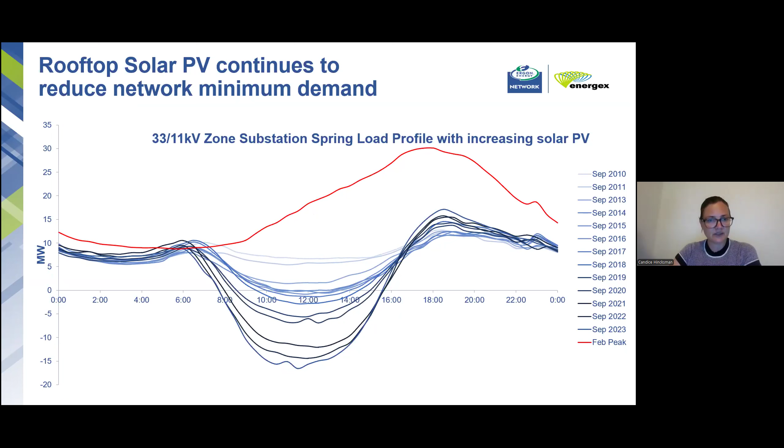And so we take a really keen interest in things that impact on electrification, on energy efficiency, or on demand flexibility, because they're all really important tools that we have as a network business to be able to address the problem that you can see on the screen now.

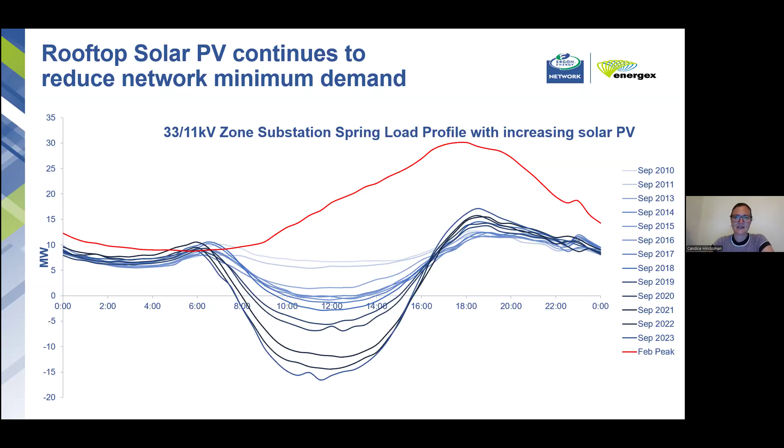So as the manager of the demand and energy management team, I run a series of demand flexibility programs. In a minute, I'll have a chat about the demand flexibility program for hot water. But that's one of many programs that we run, including our network connected battery program, our PeakSmart air conditioning program, and the programs we run to encourage the demand flexibility of electric vehicle charging.

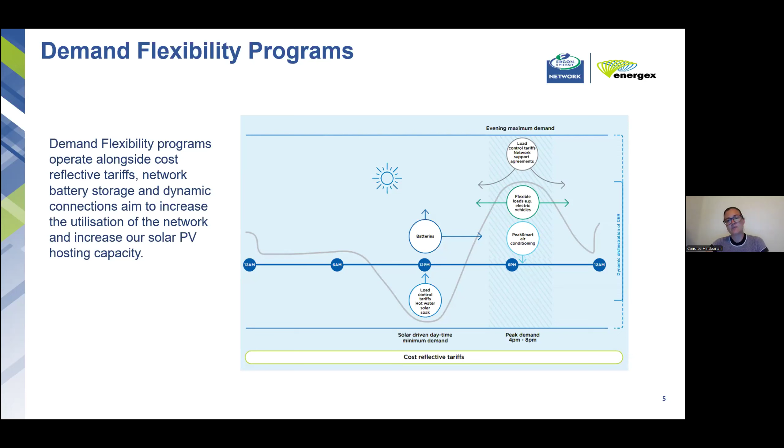And all of those programs have been underpinned by cost-reflective network tariffs and have the impact or goal of moving load outside of the peak demand period and moving that load into the middle of the day minimum demand period.

But on to hot water, because that's what we're all here to talk about today. The distribution network businesses in Queensland have had a very long history of operating hot water demand flexibility programs. These programs started back in the 1970s using our audio frequency load control technology, which is a signal that gets sent down the power wire to a signal receiver that's sitting just behind the meter. And it has the ability to turn off resistive storage hot water units.

And in response for customers participating in those programs, they have been exposed to cheaper electricity rates. This program that we've operated originated to create an overnight baseload for our coal-fired generators to be able to continue to operate in the overnight period. But as Southeast Queensland continued to experience population growth, we started to see a lot of infill happen, and we also started to see an increasing adoption of air conditioning, which slowly started to increase our evening peak demand period. And so the program evolved into a peak lopping program.

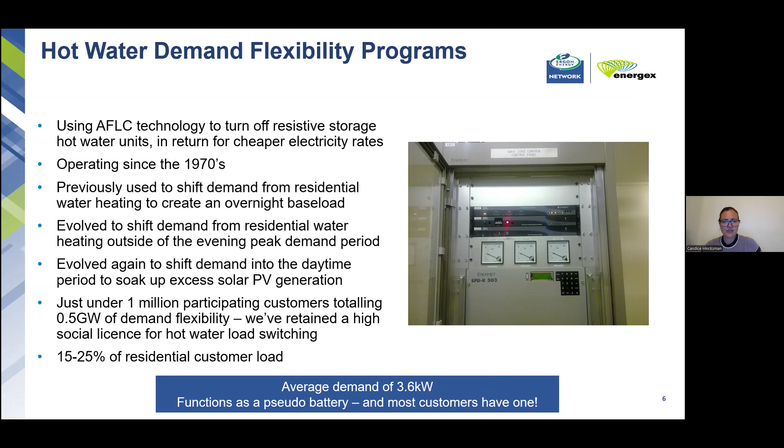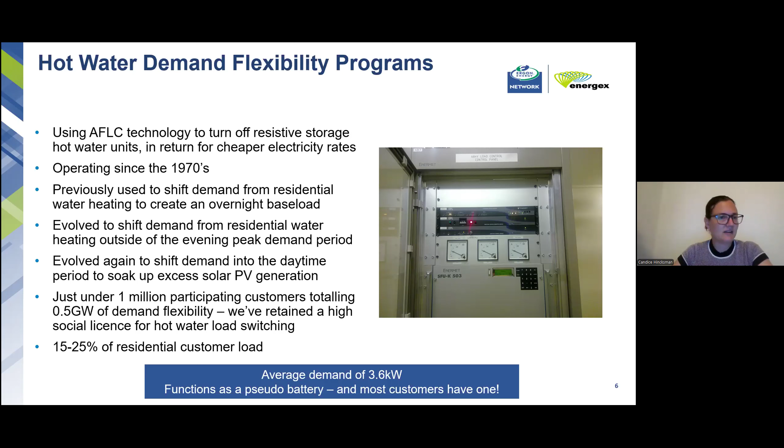That's really important for us because that program represents somewhere between 15 and 25% of our residential customer energy consumption. And with those resistive storage hot water units having an average instantaneous demand of 3.6 kilowatts, it's a substantial amount of load, and it's been operating as a pseudo battery that most customers have behind the meter. So that's where we've started, and heat pumps are here now. We do have a small number of heat pumps on the program.

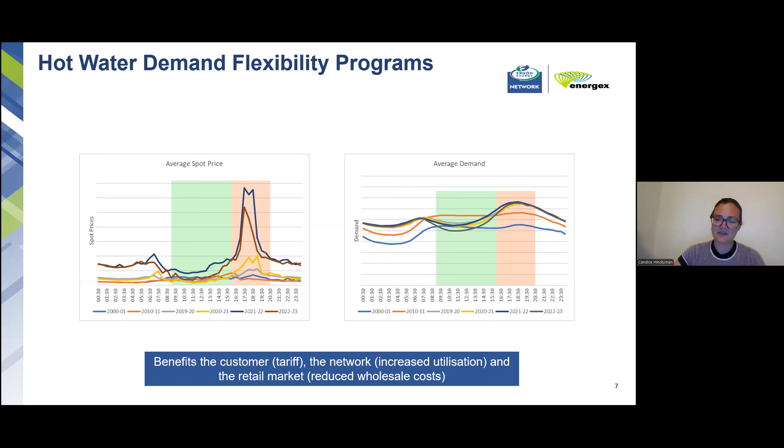I'm cautious that solar soaking is an absolutely fantastic thing, and we encourage solar soaking, and we love to see energy efficient appliances operating when the sun is shining. And 360 days of the year, this is a fantastic outcome for network businesses and for the market and for customers. I do know that there's 3 or 4 days of the year where we have abnormal peak demands hit the network when we have a cloudy day, and that demand flexibility is really important there so that we can ensure that load is not appearing and adding onto that network peak.

And so that means that the type of demand flexibility we have is relevant. And as a network business, we're not seeking to have demand flexibility every single day, but just in those days that really matter. So a key point here is that making loads flexible at the point of electrification is going to enable customers to maximise the value of their investment and their upgrade in a heat pump.

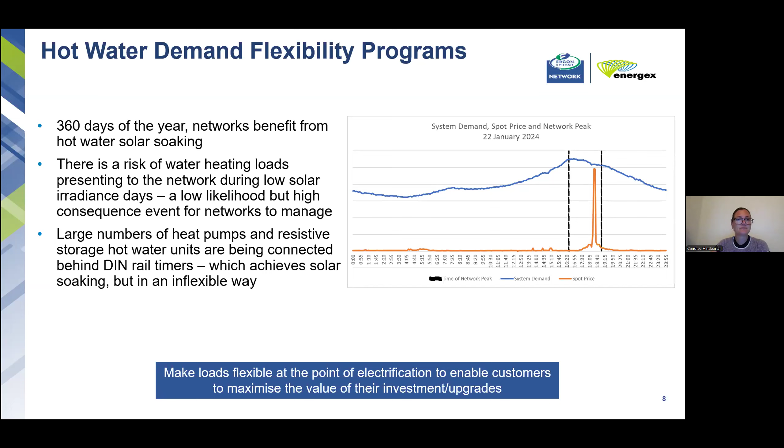But here we are, we're talking about heat pumps, and heat pumps are different to resistive storage hot water units. And so we need to take a fresh look at what demand flexibility looks like in that new environment. We're aware that heat pumps are more energy efficient than their resistive storage counterparts, and so less energy is going to be required to heat the same amount of water.

And we are in support of that electrification and that energy efficiency, but we're conscious of the impact that will have on network minimum demand. We're thankful and recognise that heat pumps place less instantaneous demand on the distribution network, which can really lower the risk of heat pumps contributing in isolation to network peak demand, and also aware that heat pumps require a longer period of uninterrupted supply compared to a resistive storage hot water unit. And so that needs to be taken into account in the way that demand flexibility is operated as well.

That said, the accumulated impact of millions of customers with heat pumps is still going to cause impacts on the distribution network business if it's not appropriately managed with demand flexibility. And so again, I'll just reiterate the key point from a distribution network perspective and from the perspective of enabling customers to absolutely maximise the value of their investment in a heat pump. We need to ensure that they are flex enabled at the point of purchase and installation, so that customer can present their load to the network and to the market in a way that helps them save money.

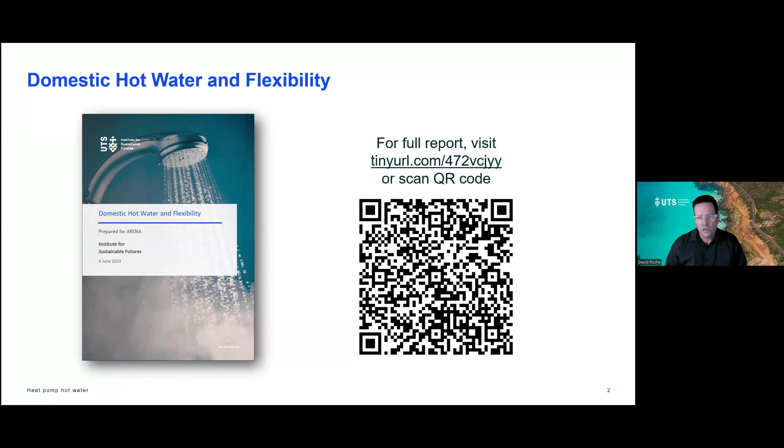Welcome everyone. So I'm going to be talking about heat pumps and building on what Candice was just talking about, also talking a little bit about resistive hot water systems, and particularly on two research projects that we've been involved with. The first one being this one published in 2023, which was commissioned by ARENA, where we looked at domestic hot water and flexibility. You can access the report using that QR code if you like. Just a couple of key takeaways from this work.

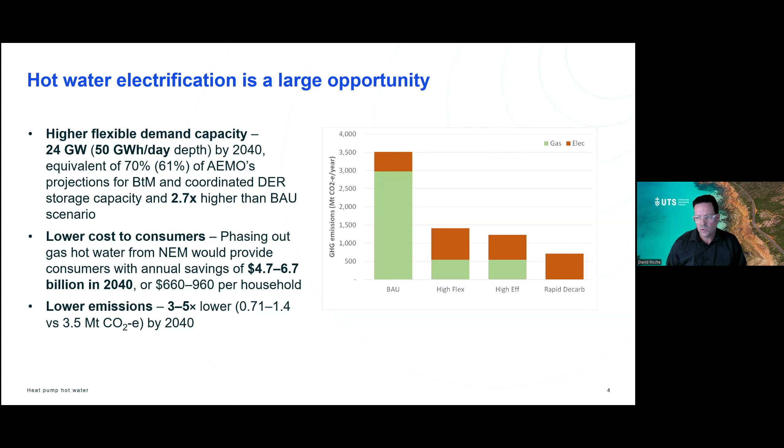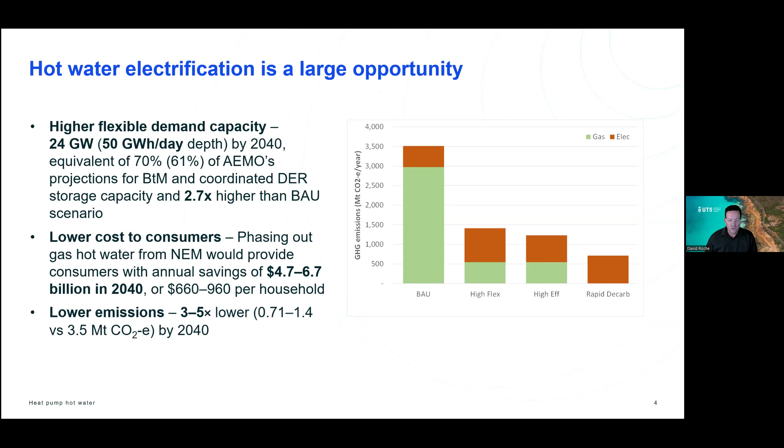So we did some modelling on different scenarios for electrifying the fleet of hot water systems across Australia. We have quite a high proportion of gas systems. And so we modelled four different scenarios, a kind of business as usual, as well as various levels of decarbonisation of the domestic hot water system. And we found some quite stark numbers. In terms of the amount of flexible demand capacity that we could add to the system, it works out about 24 gigawatts by 2040. We could lower costs for customers by between $4.7 and $6.7 billion in total. So that works out at around $660 to $960 per household. And on top of that, we also reduce emissions by 3 to 5 times compared to baseline.

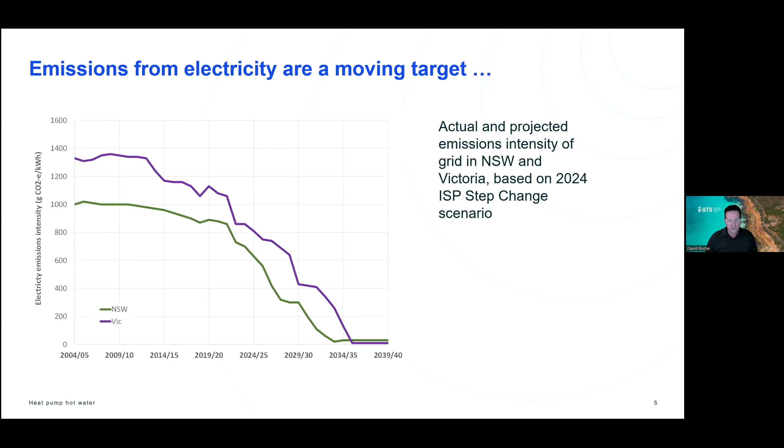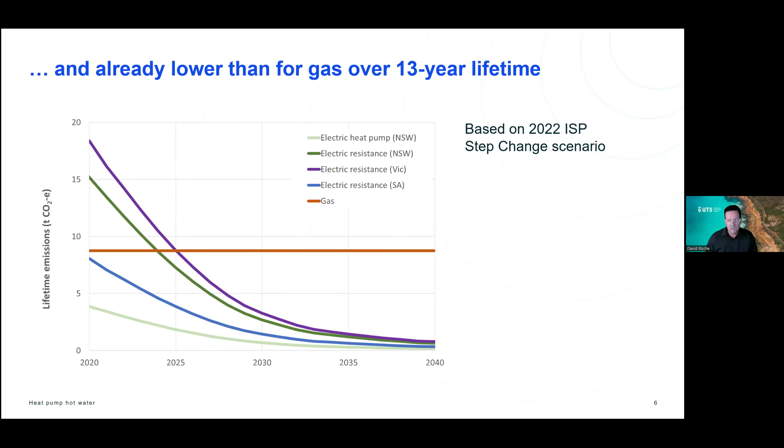And the reason that we're reducing emissions so much is that if we look at emissions from the electricity system, they're rapidly reducing as we decarbonise electricity production. So this shows emissions intensity for the grids of New South Wales and Victoria. And already, looking at some more recent analysis that we did, we find that both resistive systems and of course heat pumps are less carbon intensive than gas appliances going forward, even for the most emissions intensive state, which is Victoria, and certainly for other states, they're less emissions intensive technologies already.

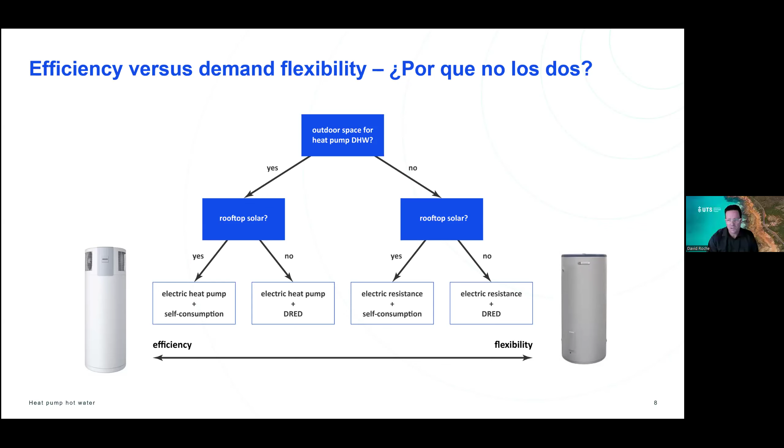So moving on to our more recent research, this has been a project funded by Race for 2030, where we're looking at a heat pump pilot as a big part of it. And a big part of this is developing some guidelines to assist community housing providers.

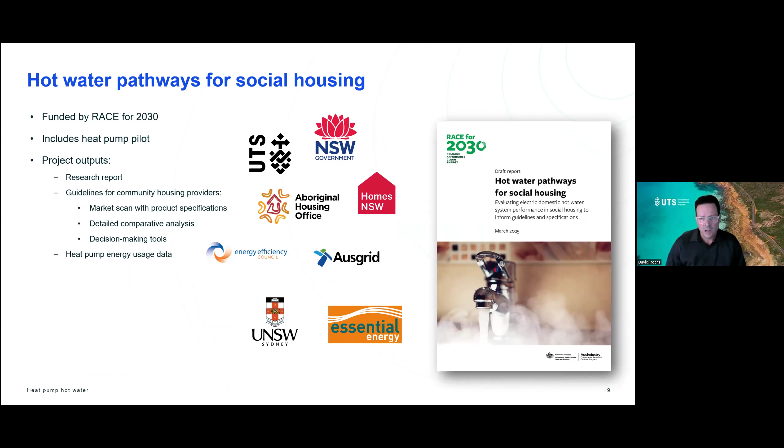So there's a market scan in here where we looked at all the different heat pump products that are available across Australia and looked at their specifications. We've done some detailed comparative analysis and developed some decision-making tools. And we also have data that we're collecting on heat pump operation, which we're providing to the two networks involved in this project, which is Ausgrid and Essential Energy.

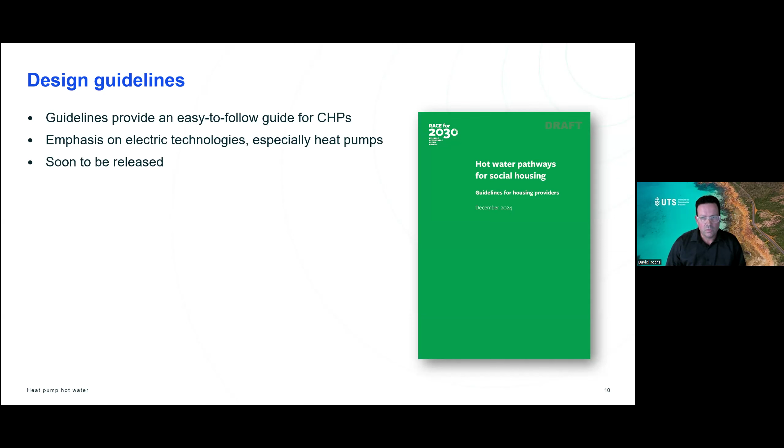The design guidelines are essentially an easy to follow guide for community housing providers. There's an emphasis in there on electric technologies, especially heat pumps. It's not released yet, but it's coming pretty soon. And in terms of the topics covered, it looks at the product specifications. So things like, what material is the tank made from? What's the temperature range? Does it make any noise? Those sorts of things.

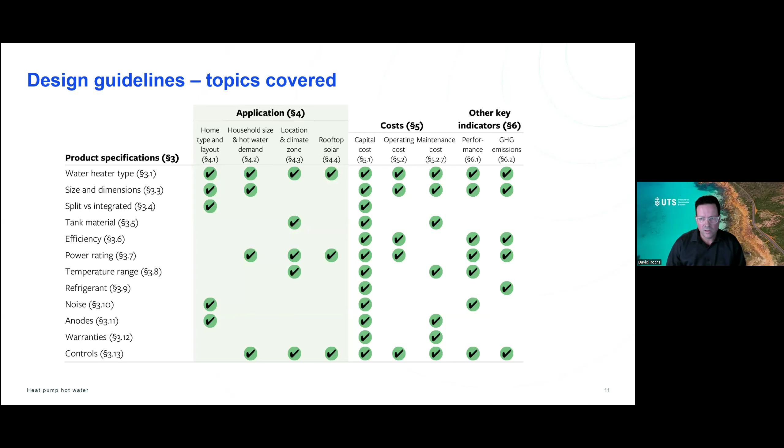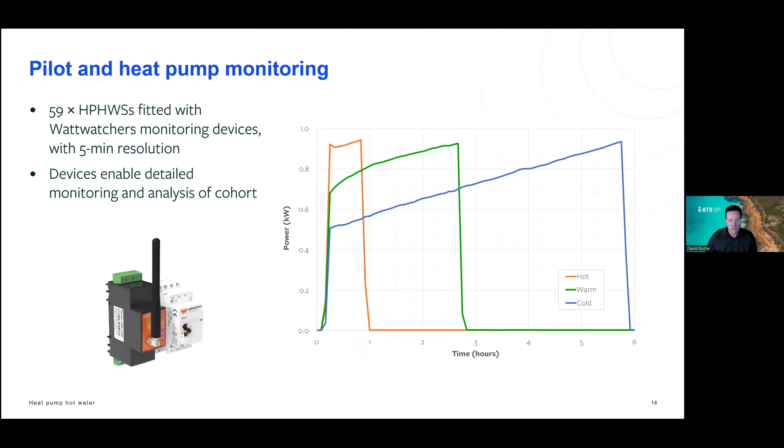The pilot itself, we've got 172, I think, homes in the pilot, but only 59 of those we've fitted with these Wattwatchers devices that enable us to monitor energy usage in detail, but also to control the systems. And so that's been quite useful for generating quite good quality data.

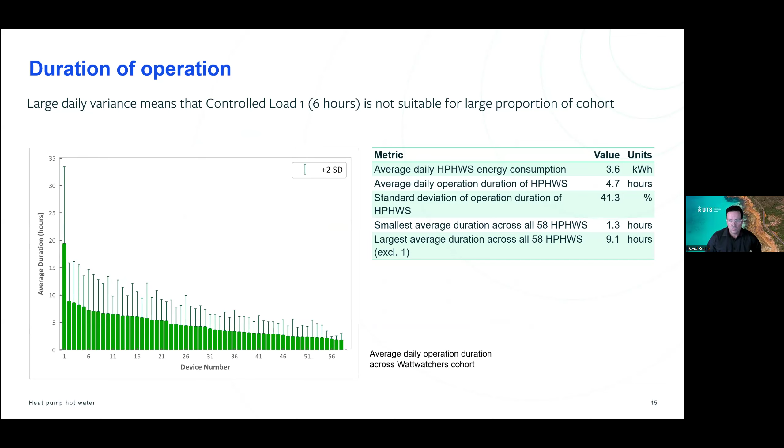So for example, here's something we looked at, which was the variance in the amount of time that's taken for the systems to operate. And so we found quite a lot of variance, meaning that, for example, controlled load 1, as Candice alluded to, is generally not acceptable for heat pumps. We are recommending, if they're going to be on controlled load, that they be put on controlled load 2 rather than controlled load 1, just because the amount of time required for them to operate is higher than it is for resistive systems.

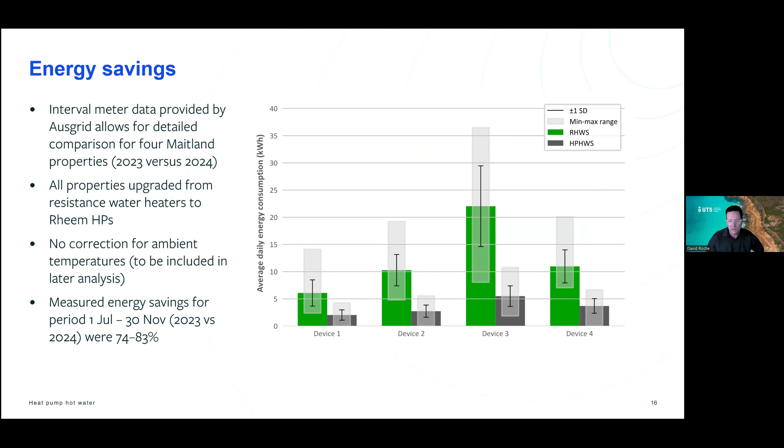Energy savings we also looked at. So here's an example of 4 homes where they went from a resistive system to a heat pump, and not surprisingly, they saved quite a bit of energy, on the order of 74 to 83% over this period that we looked at, comparing one winter to the next. And that translates into estimated bill savings of between $11 and $56 per month for that period that we looked at.

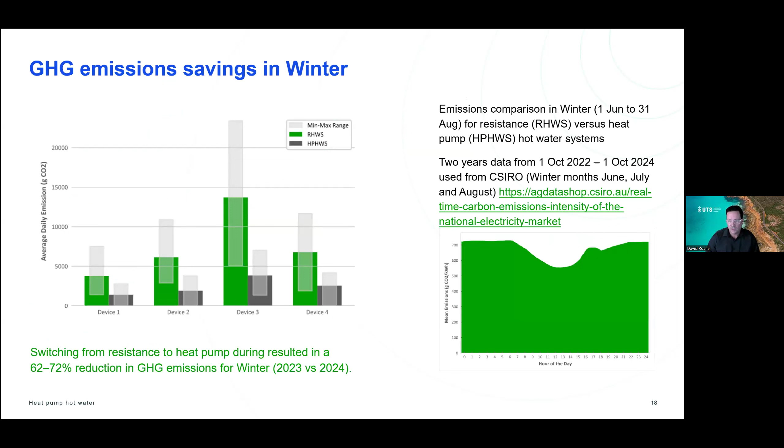In terms of greenhouse gas emission savings, we also see quite substantial reductions. Again, this is using the data that we collected from the Wattwatchers plus the bill data and estimating emissions from the 2 different technologies. So for this one winter period, we're seeing emission savings of between 62 and 72%, even taking into account the varying emissions intensity of the grid from time of day.

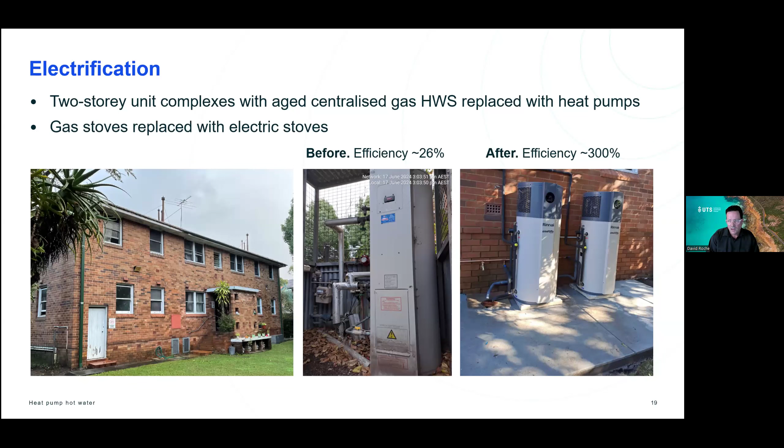And in the pilot, we also had a small number of systems that were electrified, so going from gas to electric. So this is an example of a 2-story unit complex that had some aged centralized gas systems. And we estimated the efficiency of those gas systems at around about 26%, so pretty old, pretty inefficient. And they were replaced with some nice new heat pumps at over 300% efficiency. And so, again, unsurprisingly, it's quite a stark drop in the energy consumption for each of those units, just in terms of their hot water usage.

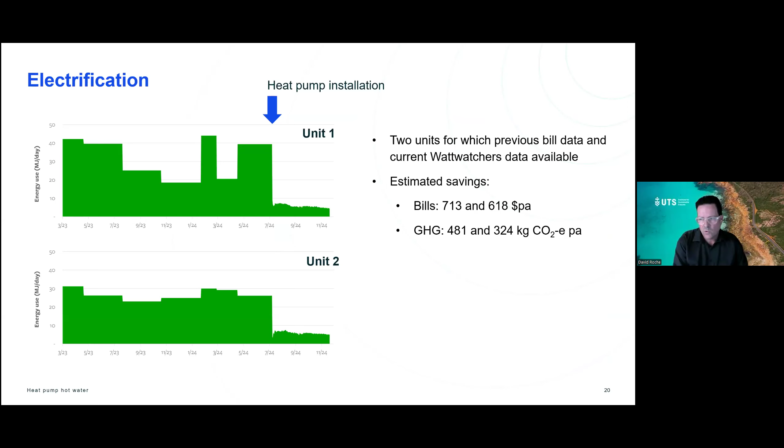And again, that translates into quite substantial bill savings for customers. So in this case, about $700 for one customer, over $600 for the other, and greenhouse gas emission savings of 481 and 324 kilograms per annum.

Now, as we've been talking a little bit about controlled load, as Candice was introducing, we've also been looking at this in the pilot as well. And so we did a controlled load intervention, or two of them, in fact. So we looked at controlled load 1 and controlled load 2, and we had to be quite selective in terms of the units that we put into them because we didn't want people to run out of hot water. And so the difference between controlled load 1 and controlled load 2 is that controlled load 2 has 2 periods of operation instead of 1.

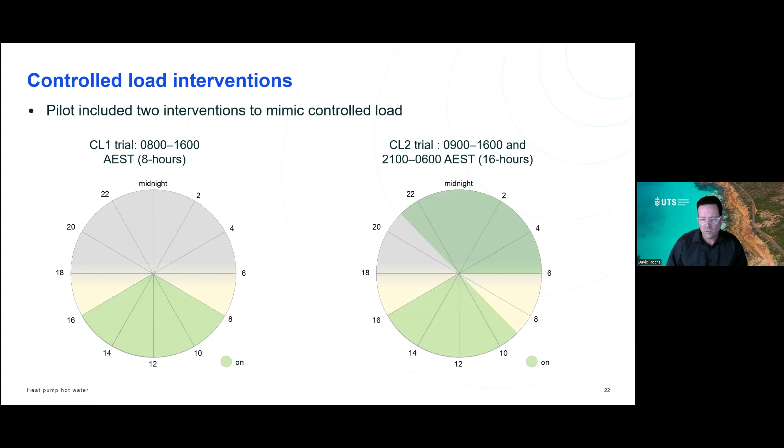So both during the daytime and also in the evening, but both of them avoiding both the morning and evening peaks. And so as a baseline, we looked at uncontrolled operation across the cohort, and we saw that there was a peak pretty much in the evening when you don't want the peak to happen. And then we put things onto controlled load 1. Again, unsurprisingly, perhaps they operate during that window that we've set for them, which is that they all switch on around 8 or 9 o'clock in the morning and then operate through to 4 o'clock. And we didn't see too many problems with people running out of hot water.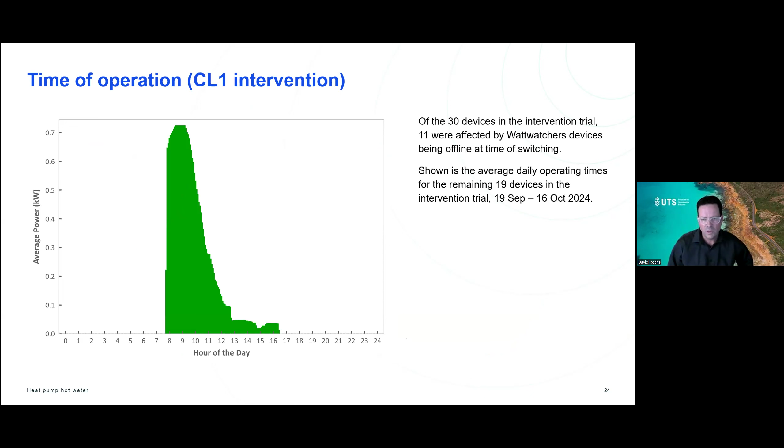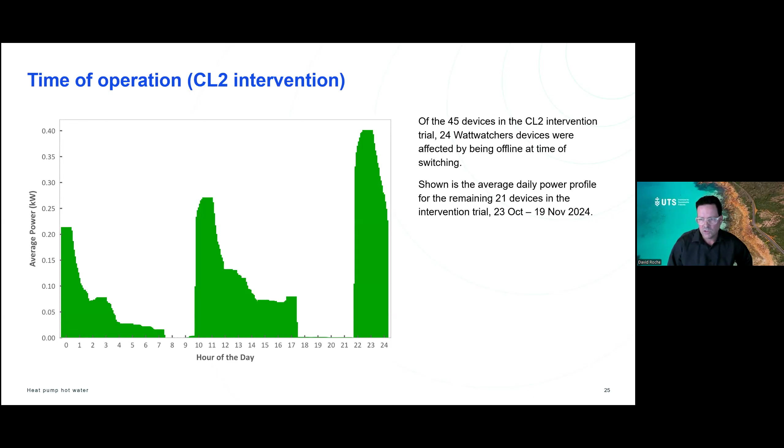For controlled load 2, we had a similar intervention with the 2 periods. And again, we're seeing that the units operate during those periods. Interestingly, the evening peak seems to be a bit higher than the midday peak. And again, we didn't see any problems with people running out of hot water. But there's a little bit of variation across the cohort. So this just gives you a bit of a flavour of the different types of profiles that we saw for each individual unit.

So talking a little bit more about control and the different ways we can control hot water systems, it's clear that the benefits of controlling hot water systems accrue to the different stakeholders in different ways. So the benefits for a resident are largely in terms of things like bill savings, and the bill savings depends on if they have solar, they need to fit their hot water system under their solar curve. If they have a time of use tariff, they can save money that way. The housing providers, in this case, they want things that are not too complicated and don't require them to go out and have to service units or increase their risks in any way. Whereas the networks are going to be benefiting from the controllability of units. And so the different types of control strategy give different benefits to those different stakeholders.

And so we map those out in this case to look at, well, which of those control strategies actually gives the best option. Things like smart timers, generally a pretty good option, but not something that's widely available in the market. Inverter signals also score quite highly. But things like timers and so on, not always the best option for either networks or for customers.

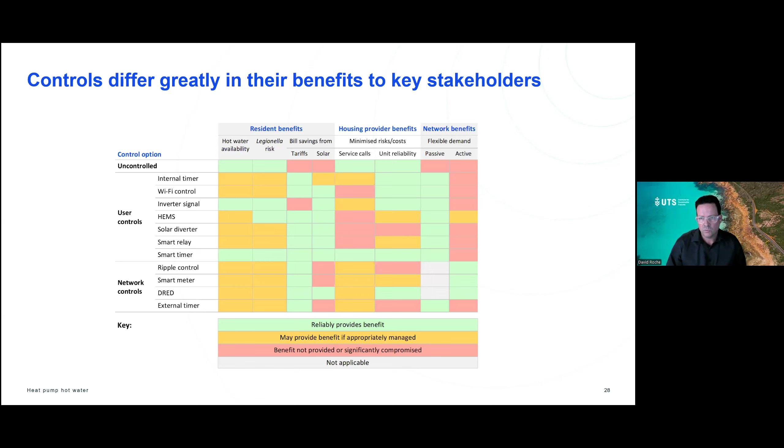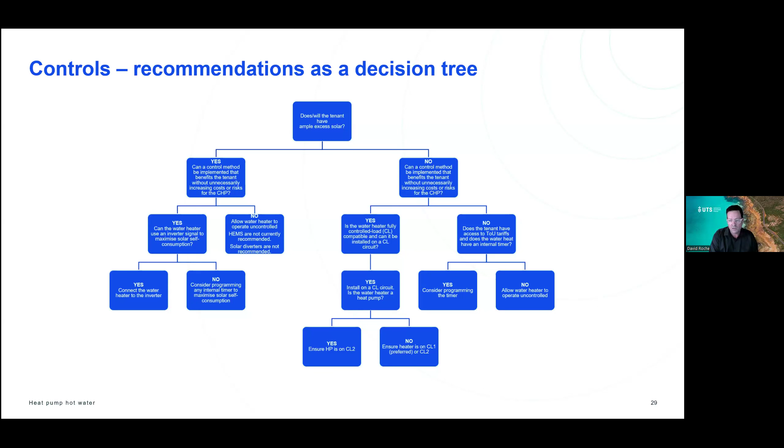And so this is, getting back to this decision tree idea, we've used that framework to map out the different decision points for a community housing provider in terms of how they would perhaps enable control of hot water systems. And so we start with, does the tenant have solar? Yes, no. If they do have solar, is there a control method that can be implemented that benefits the tenant without unnecessarily increasing risks? So yes, no. And so we go down this tree and we end up with different outcomes depending on the exact scenario. And there's quite a few variables in there, so solar being one of the key ones, but also things like, is the heat pump unit compatible with controlled load, for example? So we've seen in our market scan that not all systems are fully controlled load compatible.

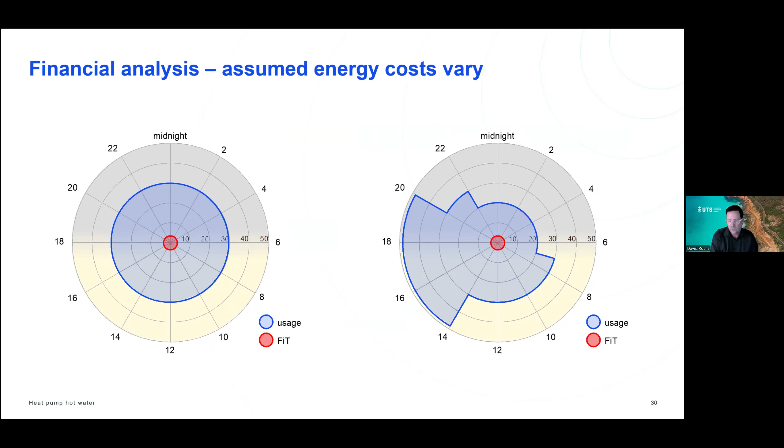And finally, we did some financial analysis to look at the different operating costs, but also the different lifetime costs of different options. And so this just gives you a sense of the different tariffs that are available. So on the left, we have flat tariffs where the blue circle is just a constant 30 cents a kilowatt hour during the day. The red circle is the feed-in tariff for solar. So if you're operating off solar, you get essentially a much lower opportunity cost for operating your system off your own solar rather than using power from the grid. And then also we looked at time of use tariffs, which is what's represented on the right.

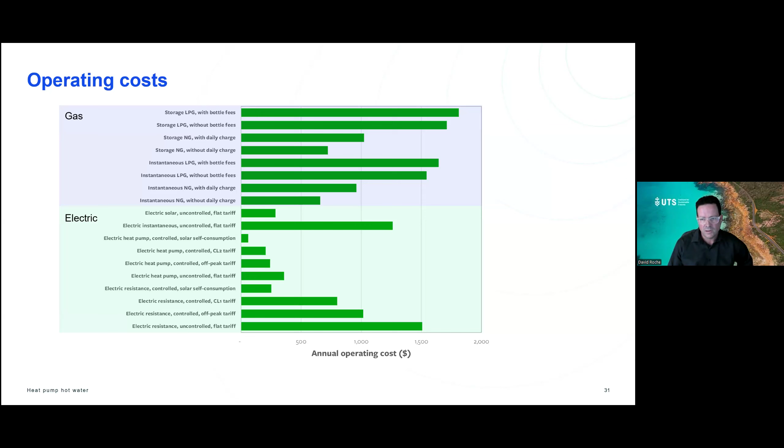And so in terms of operating costs, we saw that the electric systems varied quite a bit. The gas systems were amongst the most expensive. But the electric systems really depends on whether you're using solar or not. So if you have access to solar, you can get very cheap operating costs. Whereas if you don't have access to solar, electric resistance systems can be among the most expensive systems to operate. And in terms of the lifetime cost, that translates into, again, electric resistance systems can be either the cheapest or the most expensive system, depending on whether you have access to cheap solar or not.

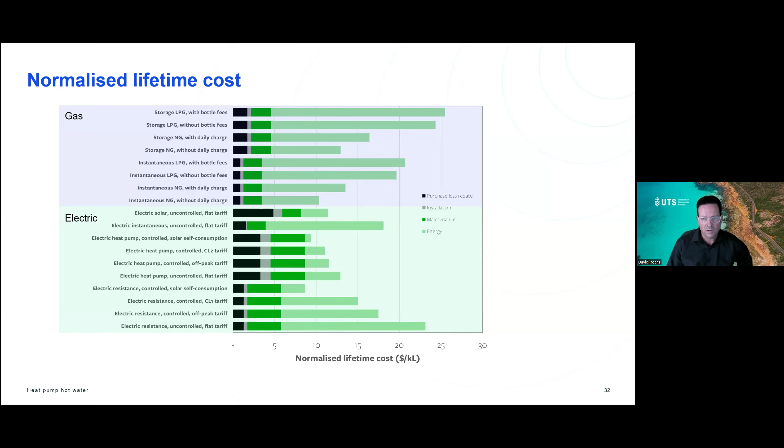And gas among the more expensive systems. So we think there is a role for heat pumps, and they're certainly one of the cheapest systems to operate, but in terms of lifetime cost, they're more expensive in terms of capital. So we think we need a bit of a mix of both. And finally, just in terms of greenhouse gas emissions, again, we find the electric systems are among the lowest in terms of emissions, gas systems much higher.

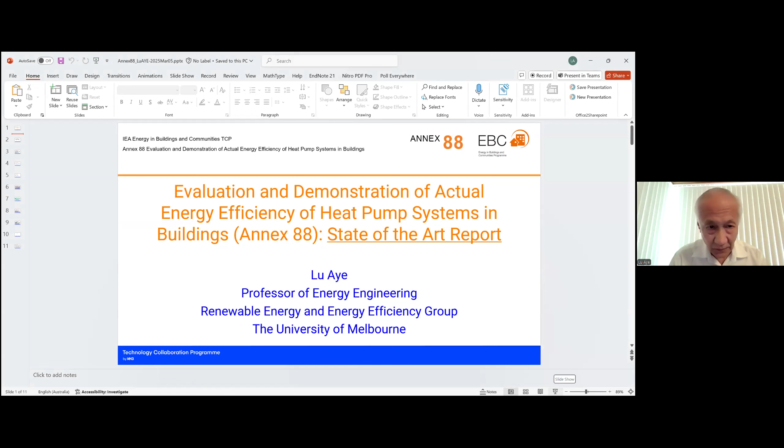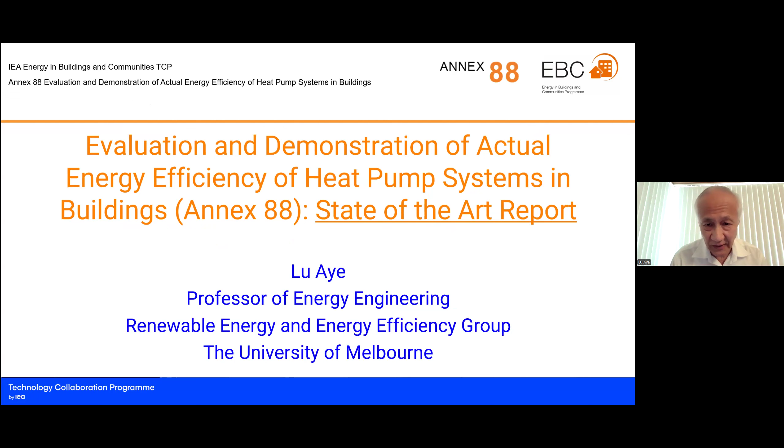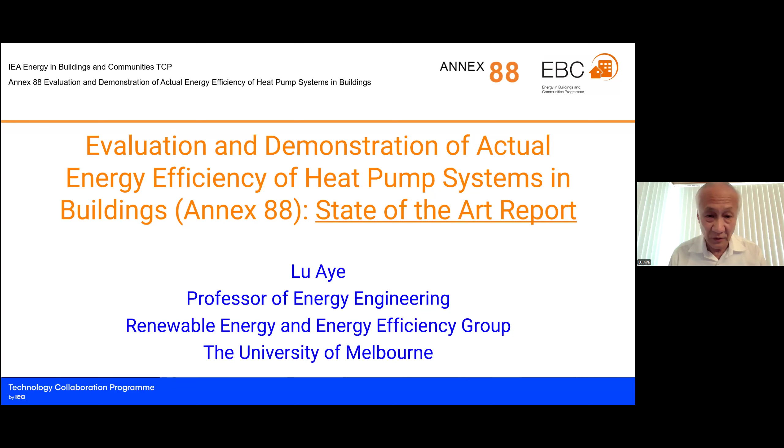And this is the report that we have written. This is a part of Annex 88. So in my presentation, I would like to tell you a little bit about Annex 88, what we have done and the project duration. We started in 2022, and some of the time we couldn't meet face to face, so we did it during COVID through the web, Zoom and other things. So we have output out of that.

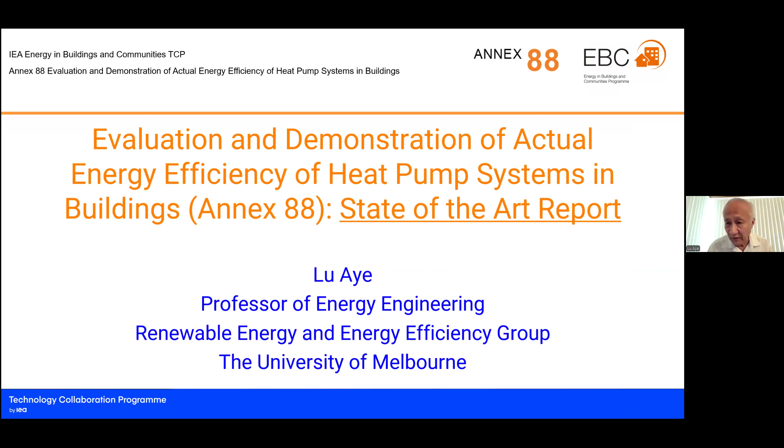So Annex 88, if you go to our website, you will see our operating agent from Japan, and this is ongoing at this moment. We will finish in 2027, end of June. So what are the issues we are going to look at? If you look at the performance tested in the lab and the real-world performance, they don't match. And there is a lack of standardized load-based testing, and we have insufficient field monitoring data. Some of it is dispersed, some of it is available. However, if you are going to do artificial intelligence or extract data out of that, that's not enough.

Especially Annex 88 is looking at the interaction between heat pump and building, how they perform in buildings. So we intentionally leave out hot water, and we look at building cooling and heating. We have another IEA Annex looking at heat pump hot water, so that's why we leave out hot water systems here. Another one is inefficiency. We found that some of it comes from improper sizing and installation. So we look at 4 areas: testing methods, field monitoring methods, how we calculate the performance when applied in buildings, and how we design our system. These are the objectives of this annex.

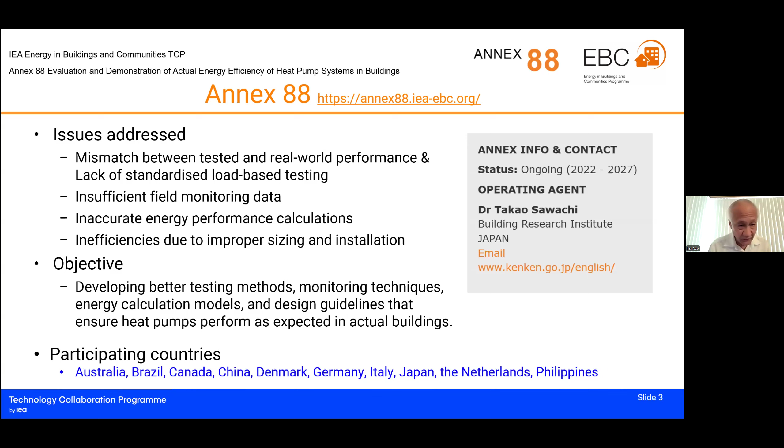First is a lab test on the left-hand side, and on the right-hand side is a load-based test. What is the difference? The important thing is the fixed compressor speed that we normally test in the lab for rating our system, which manufacturers are required to do. On the horizontal axis you will notice the time, and this is a steady state test. On the right-hand side, the test is about 7 hours. As you can see, this is unsteady, real-life operation simulated in the lab test.

The important one I would like to show you is the COP difference. It's very simple. If you do a steady state test at a certain fixed condition, your coefficient of performance, or energy efficiency, is about 7. If you go for dynamic tests, or simulated real-life tests, you will find about 5.5 COP. And this is misleading when you are applying it. We might expect the rated COP of 7, and in reality we are not getting that. The reason is that lab testing is different from real life. The right-hand figure is an emulator we use in the test. It is repeatable, and what we found is that it is much closer to real-life operation.

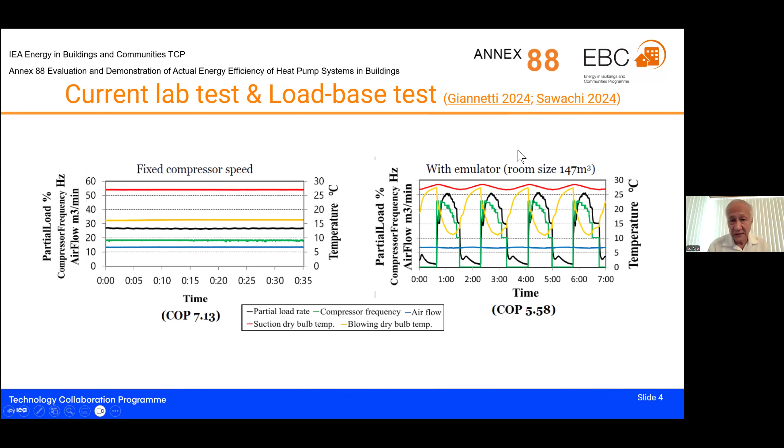And the second one is what we call field test COP and the rated COP. On the horizontal axis on this graph, you will see the partial load ratio. Partial load ratio means the capacity of the heat pump relative to the maximum capacity of the heat pump, and how we are running it. A heat pump doesn't run full load all the time, so there you can see partial load.

And these are the field test data, actual measured data, and you will see the outdoor temperature range -3, 0, 3, 6, 9, and 12. You can see those symbols there. And you can see the two important ones there. It's a test according to the Japanese standard for this circular one, the middle capacity test, and then rated capacity according to that, and the full load capacity is the catalog value.

You can see that. And in real operation, you can see on the left-hand side you have a lot of dots, and the heat pump is operating at partial load ratio. So if you have a very low partial load ratio, your COP will be low, as you can see. So the important point I want to make here is that the field test is the one that tells us the performance we are going to get when we apply it in the building.

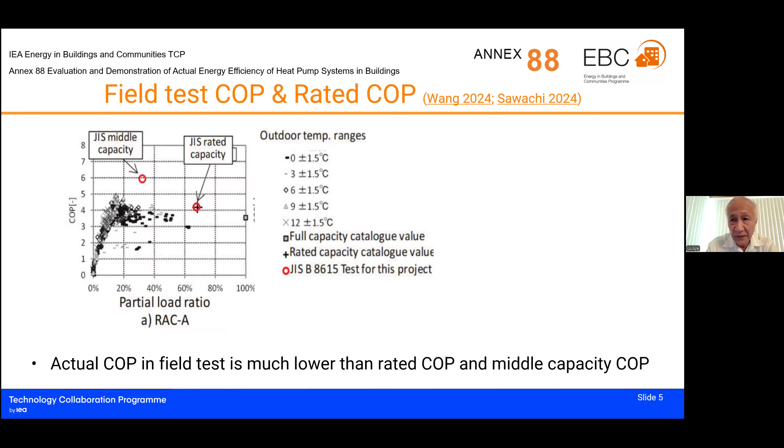And these are some findings from calculation methods, which Lawrence presented in December. His finding is that different countries have different dominant needs. For example, European countries will need heating. In Australia, some areas may need only cooling, and some areas will need heating for the building. They also have different types of systems, water-based or air-based. Some provide hot air or chilled air, or in Europe you will see chilled water supply or hot water supply. Heat pumps can do all sorts of things there.

And when we look at the calculation methods, we found a lot of different types of heat pumps, and the heat source, where the heat comes from, and where the heat is transferred to. You transfer it to your room or to your hot water, and how do we control that? And what other things are combined with the heat pump? Heat pumps are used for drying or other things. However, we are looking here at design methods applicable to buildings. So many types, so we don't have clear product data.

And internationally, if you are going to import something from some other country, you have to meet the standard requirements, and you have to declare the star rating or performance required. And that makes exporting and importing harder. They have to do it again. So what we also find is that none of them are completely reliable, and they are very disparate. Okay? And the data needed depends on the method that we use.

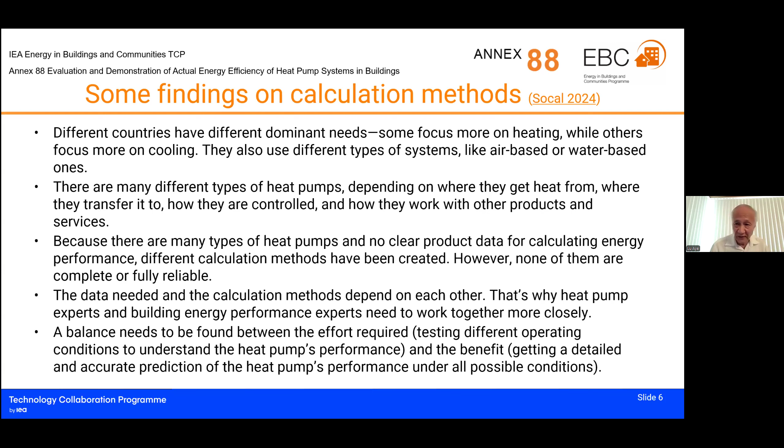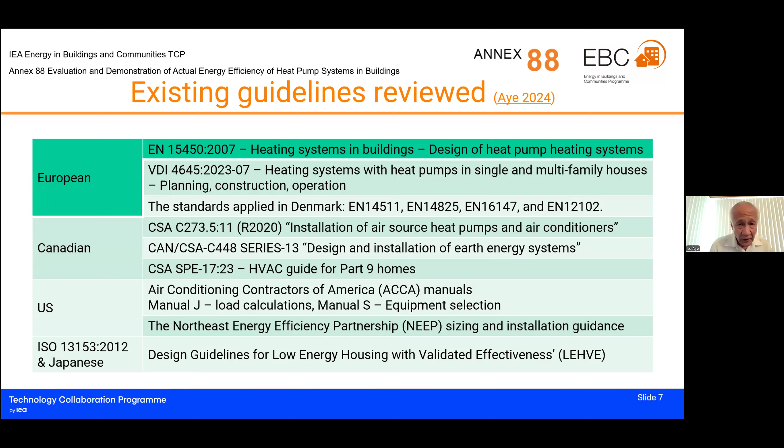And this is an existing guideline or standard that we have reviewed. I was in charge of reviewing that, and we have a team of researchers reviewing those, and they contributed to chapter 4 of that report. I'm not going to go into detail on what each individual standard does. The important one here is what we are going to do in the future. We are developing a sizing procedure for heat pumps that may be universally applicable, hopefully. And we are aiming very ambitiously.

And then that's end of June 2027, sorry, end of June, that we are expected to deliver. Okay. And how do we avoid the low partial load condition to improve the efficiency? So this is also an important aspect. And how do we incorporate it in the control system? These are the issues there.

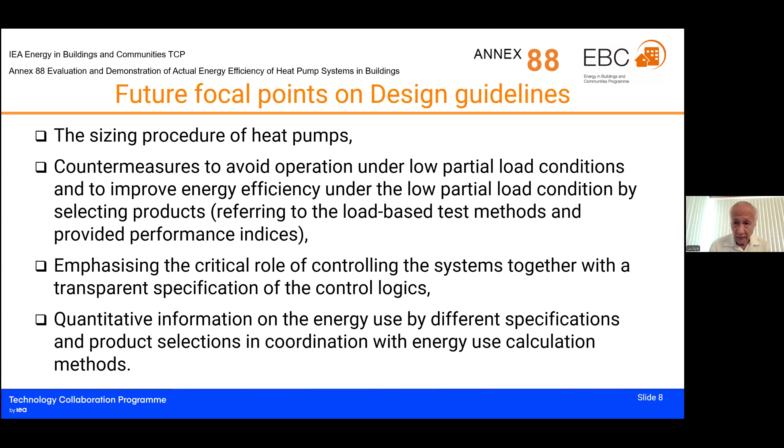And another one is quantitative information for different specification and product selection. How do we select those and how do we use it in energy calculation methods? These are the ones that we are aiming for. It's future work in part D. That's the design guideline part.